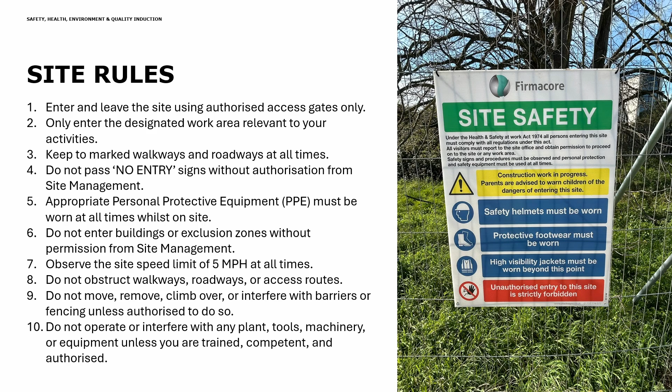Observe the site speed limit of 5 mph at all times. Do not obstruct walkways, roadways or access routes. Do not move, remove, climb over or interfere with barriers or fencing unless authorised to do so. Do not operate or interfere with any plant, tools, machinery or equipment unless you are trained, competent and authorised.

Do not excavate in any area unless a valid permit to dig has been issued by site management. All personnel involved in the permit to dig activity must be signed on to the permit and fully briefed before work begins. Do not ride on plant or machinery unless it has been specifically designed to carry passengers.

Do not disconnect, cut, or interfere with any electrical cables without a valid permit to work issued by site management. When working near protected trees or designated preservation areas, a tree protection form must be completed before work commences.

Employers are responsible for ensuring safe systems of work are implemented for their employees. Contractors and subcontractors must comply with all health and safety regulations whilst working on site. Report any hazards, unsafe conditions, or unsafe acts immediately to site management. Follow all emergency procedures issued by site management and ensure you know the location of the site assembly points.

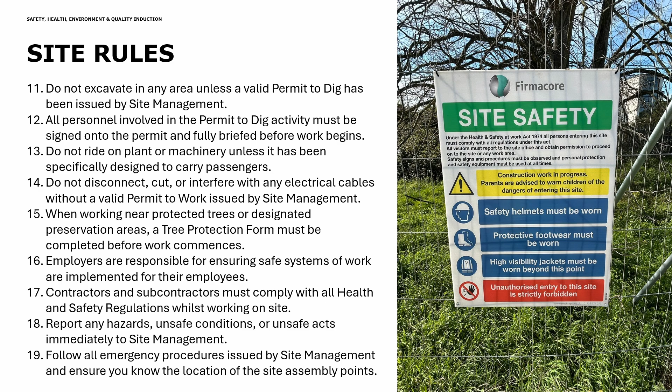Carry out your work safely at all times. If you believe any task is unsafe, stop work immediately and report it to site management. Remain aware of plant and machinery movements and keep clear of operating and swing areas.

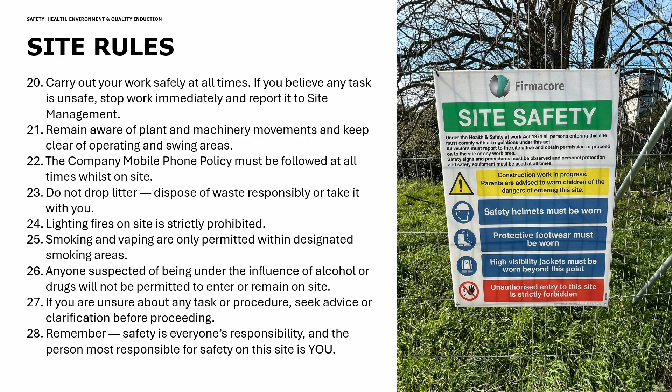The company mobile phone policy must be followed at all times whilst on site. Do not drop litter, dispose of waste responsibly or take it with you. Lighting fires on site is strictly prohibited. Smoking and vaping are only permitted within designated smoking areas. Anyone suspected of being under the influence of alcohol or drugs will not be permitted to enter or remain on site. If you are unsure about any task or procedure, seek advice or clarification before proceeding. Remember, safety is everyone's responsibility, and the person most responsible for safety on this site is you.

Exclusion zones. Firmacore Limited uses exclusion zones to prevent unauthorised access to hazardous work areas and protect personnel from potential risks. Exclusion zones must be clearly established and maintained at all times, and no person should enter or work within the zone unless it is absolutely necessary and authorised to do so.

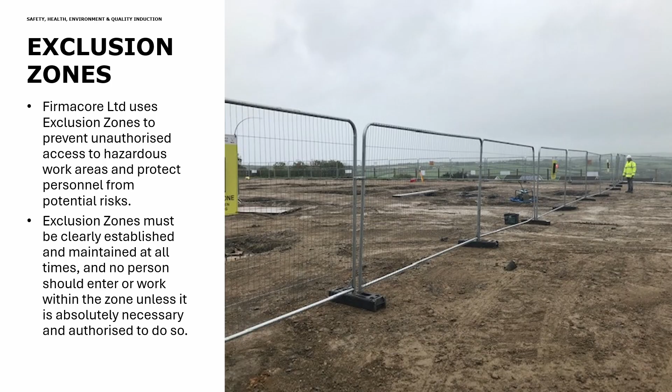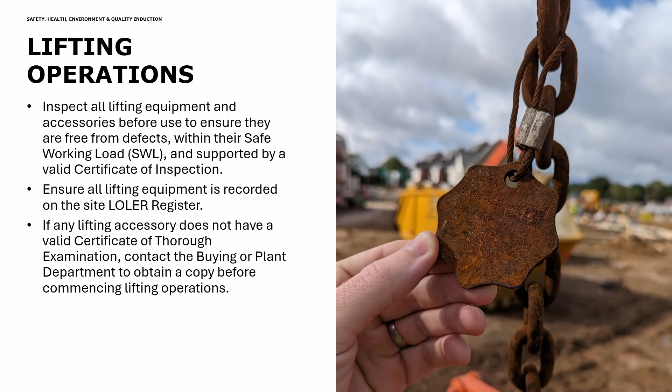Lifting operations. Inspect all lifting equipment and accessories before use to ensure they are free from defects, within their safe working load (SWL), and supported by a valid certificate of inspection. Ensure all lifting equipment is recorded on the site LOLER register. If any lifting accessory does not have a valid certificate of thorough examination, contact the buying or plant department to obtain a copy before commencing lifting operations.

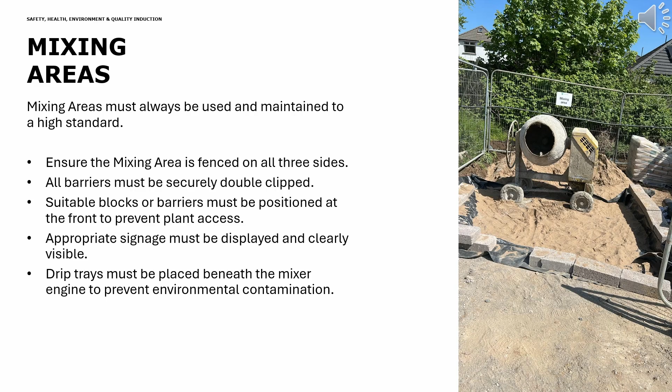Mixing areas must always be used and maintained to a high standard. Ensure the mixing area is fenced on all 3 sides. All barriers must be securely double-clipped. Suitable blocks or barriers must be positioned at the front to prevent plant access. Appropriate signage must be displayed and clearly visible. Drip trays must be placed beneath the mixer engine to prevent environmental contamination.

Banksman. What is a banksman? Banksmen are operatives trained to direct vehicle movement on or around site. They are often called traffic marshals. Can we still use banksmen for reversing vehicles? Yes, but only if trained and authorised. There is a hierarchy of control, which places segregation at the top. Banksmen should only be used in circumstances where other control measures are not possible.

What is a signaller? Signallers are operatives who are trained to direct crane drivers during lifting operations. How can we keep signallers safe? Ensure that they are trained and competent to direct lifting operations. Provide a protected position from which they can work in safety. Provide distinctive high-vis clothing for identification. Tell drivers that if they cannot see the signaller, they should stop immediately. Agree on the use of standard signals.

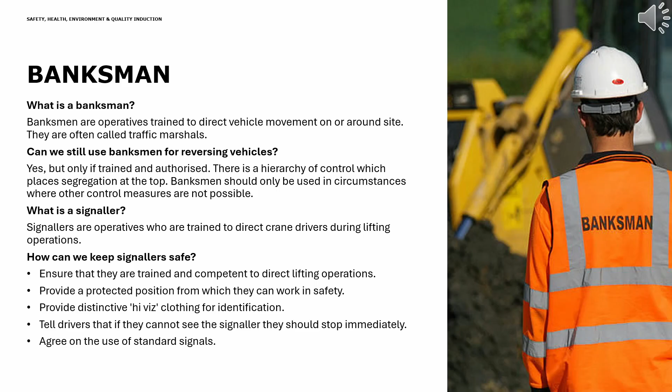PPE. You are required to wear your PPE at all times when on site. This includes, but is not limited to, a hard hat, high-vis jacket, safety boots, and, where appropriate, gloves, goggles, FFP3 dust mask, ear defenders, long-sleeve high-vis jacket and trousers if entering the highway. If your PPE becomes damaged or missing, then let the supervisor know, who will arrange for a replacement.

Plants and equipment. You are required to ensure the safe operation and maintenance of heavy machinery, such as dumpers, 360 excavators, and rollers at all times when on a construction site.

Always perform a pre-use inspection to check for any damage or issues. Ensure that you are trained and certified to operate the specific machinery. Use the safety features, such as seatbelts and rollover protection structures, ROPS. Adhere to the manufacturer's instructions and guidelines. Make sure the machinery is regularly serviced and maintained.

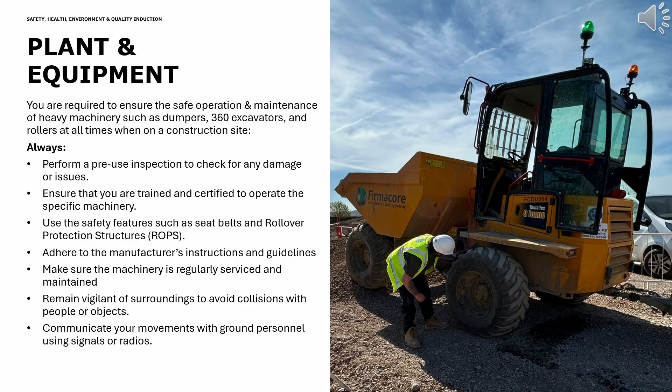Remain vigilant of surroundings to avoid collisions with people or objects. Communicate your movements with ground personnel using signals or radios. Where appropriate, use spotters or guides when operating in confined or crowded areas. Reduce speed in wet or slippery conditions. Follow designated routes for the movement of machinery.

Keep the machinery clean, especially windows and mirrors, for better visibility. Ensure that warning signs and beacons are functioning and visible. Check for proper functioning of brakes, lights, and other vital components. If any machinery becomes damaged, or if you notice any issues that could affect safe operation, report it immediately to the supervisor, who will arrange for it to be repaired or replaced. Never operate machinery that is damaged or in poor condition, as this poses a risk to your health and safety and that of your colleagues.

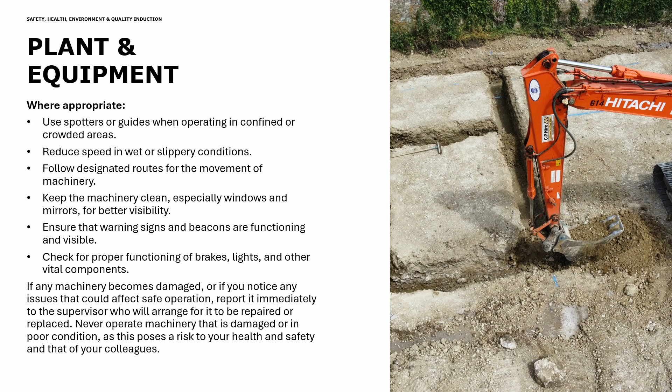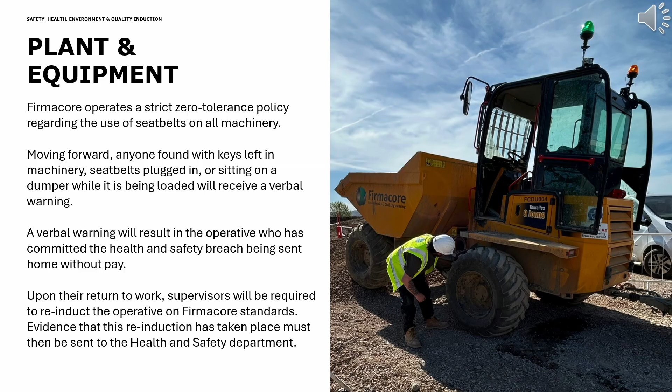Firmacore Limited operates a strict zero-tolerance policy regarding the use of seatbelts on all machinery. Moving forward, anyone found with keys left in machinery, seatbelts plugged in, or sitting on a dumper while it is being loaded will receive a verbal warning. A verbal warning will result in the operative who has committed the health and safety breach being sent home without pay. Upon their return to work, supervisors will be required to re-induct the operative on Firmacore Limited standards. Evidence that this re-induction has taken place must then be sent to the Health and Safety Department.

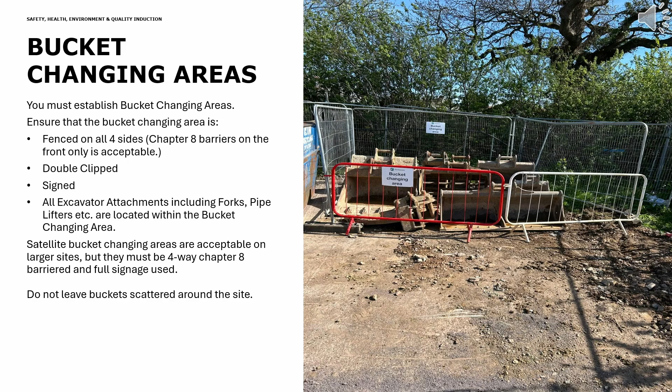Bucket changing areas. You must establish bucket changing areas. Ensure that the bucket changing area is fenced on all 4 sides, Chapter 8 barriers on the front only is acceptable, double-clipped, signed. All excavator attachments, including forks, pipe lifters, etc., are located within the bucket changing area. Satellite bucket changing areas are acceptable on larger sites, but they must be 4-way Chapter 8 barriered and full signage used. Do not leave buckets scattered around the site.

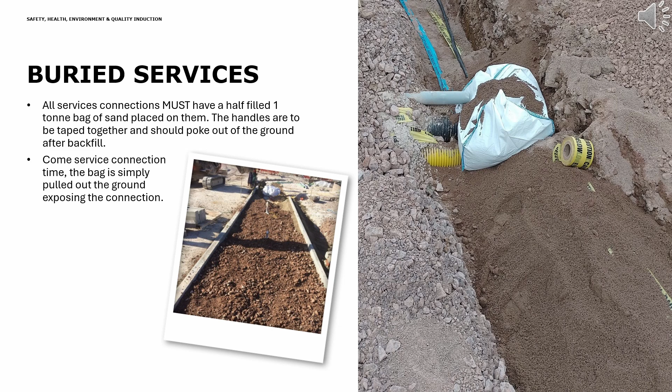Buried services. All services connections must have a half-filled 1-tonne bag of sand placed on them. The handles are to be taped together and should poke out of the ground after backfill. Come service connection time, the bag is simply pulled out the ground, exposing the connection. Only use insulated hand tools within 500 mm of any known live service.

No excavation for services should occur without first obtaining the correct utility drawings, drainage layout, and service box locations on house drawings. Cross-reference all drawings with the register. Complete permit to break ground and CAT scan the working area. The site supervisor must identify services and no-dig areas to the excavator operator.

Services must be positively identified where known to exist. This is to establish depth and direction. This can be done by digging trial holes or slip trenches using insulated hand tools. Vacuum excavation must be used around high voltage and high pressure services, greater than 2.0 bar.

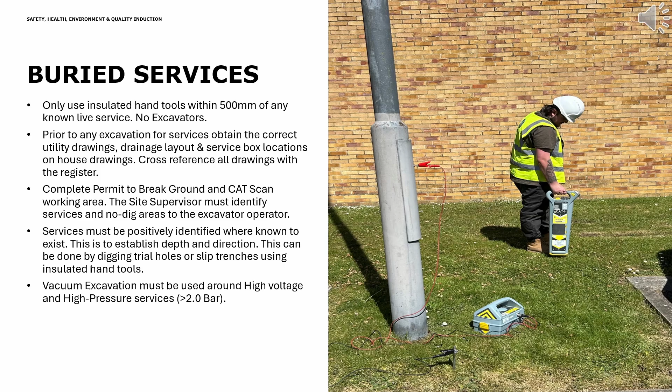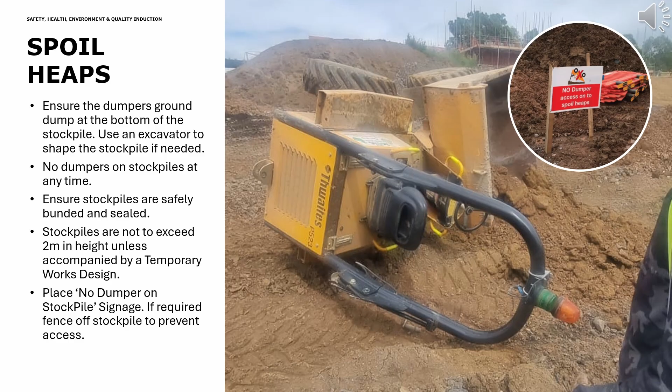Spoil heaps. Ensure the dumpers ground dump at the bottom of the stockpile. Use an excavator to shape the stockpile if needed. No dumpers on stockpiles at any time. Ensure stockpiles are safely bunded and sealed. Stockpiles are not to exceed 2 meters in height unless accompanied by a temporary works design. Place no dumper on stockpile signage. If required, fence off stockpile to prevent access.

Housekeeping. Safety enhancement: good housekeeping reduces the risk of accidents, enhancing overall safety. Increased productivity: a clean, organized site leads to more efficient workflows and higher productivity. Reduced losses and damage: proper storage prevents loss and damage to materials and equipment. Compliance with regulations: housekeeping helps meet health, safety, and environmental regulations. Improved health: elimination of dust and debris reduces health issues among workers. Positive image: a well-maintained construction site reflects positively on our business.

We have all worked tirelessly to build a great reputation. Please play your part in maintaining it.

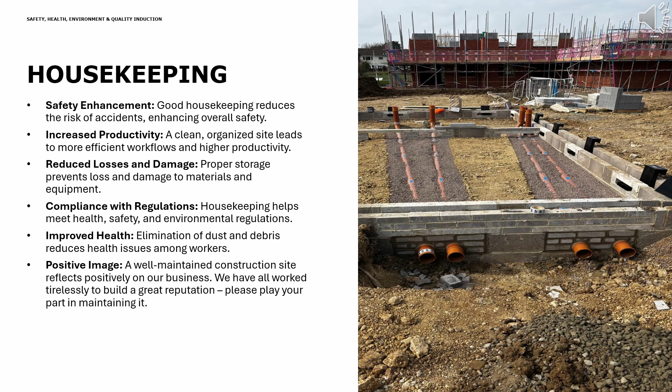Further benefits are prevention of fires. Proper disposal of flammable materials reduces the risk of fire incidents. Reduced environmental impact: proper waste disposal minimizes environmental impact. Improved morale: a clean and organized workplace boosts workers' morale and job satisfaction. Increased lifespan of tools and equipment: regular maintenance extends the lifespan of tools and equipment.

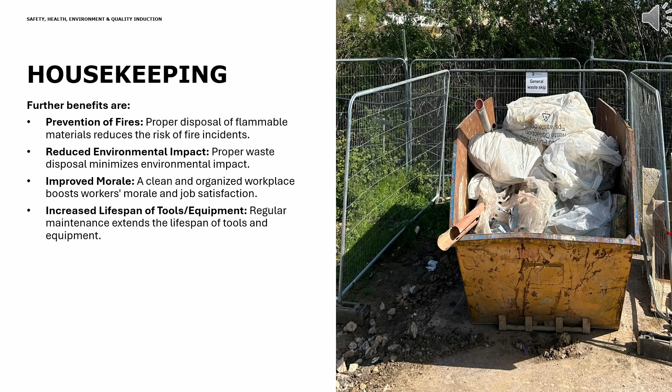What to do if you have a minor accident? There are steps you must follow. Seek first aid if necessary. Alert the site supervisor and fill out an accident report form.

The first aiders for the site will be shown to you when you first arrive on site. At the same time, you will also be shown exactly where the first aid box or station is and where the accident book is. Your supervisor will report the incident for you.

What to do in an emergency? If there is an emergency on site, you must do the following.

Raise the alarm and inform any others of the need to evacuate. Leave the area by the nearest exit. Make your way to the assembly point. Contact the emergency services. Emergency exits and assembly points will be shown to you when you arrive on site.

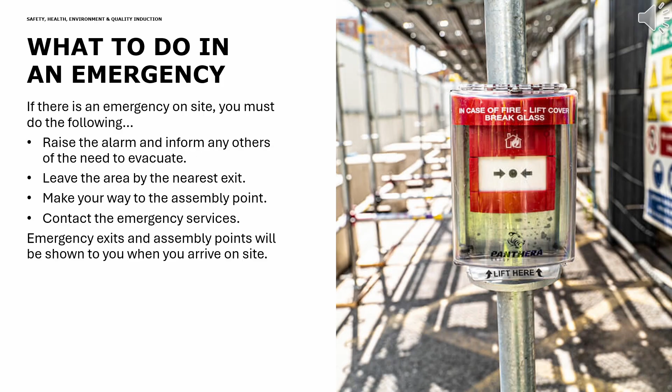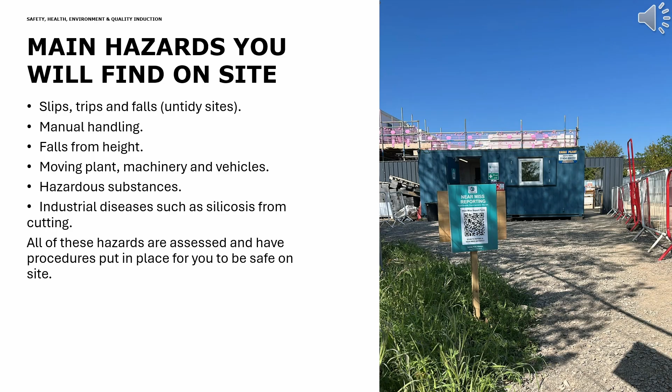Main hazards you will find on site: slips, trips and falls, untidy sites, manual handling, falls from height, moving plant, machinery and vehicles, hazardous substances, industrial diseases such as silicosis from cutting. All of these hazards are assessed and have procedures put in place for you to be safe on site.

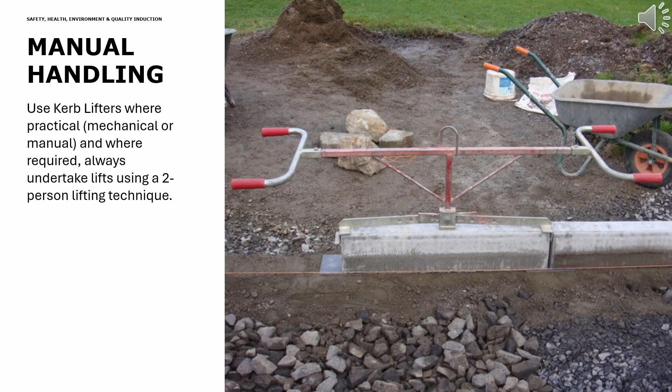Manual handling. Use Kerb Lifters where practical, mechanical or manual, and where required, always undertake lifts using a two-person lifting technique.

Excavation safety. Protective systems. Depending on the excavation depth and soil type, use protective systems such as trench boxes, shoring, or benching to prevent cave-ins. Safe access and egress.

Provide ladders, steps, ramps, or other safe means of exit for workers in trench excavations. Regular inspections. Conduct daily inspections of the excavation site, particularly after a rainstorm or other changing conditions that might affect the soil stability.

Hazard awareness. Clearly mark all excavation edges and provide barriers or fencing around the excavation site to prevent accidental falls. Falling and tripping hazards. Keep the excavation site clear of debris, tools, or other materials that can pose falling or tripping hazards. Use youngman boards to safely walk across an open trench.

If it is not safe, don't do it. Firmacore Limited will fully support you if the task you are being asked to perform is unsafe.

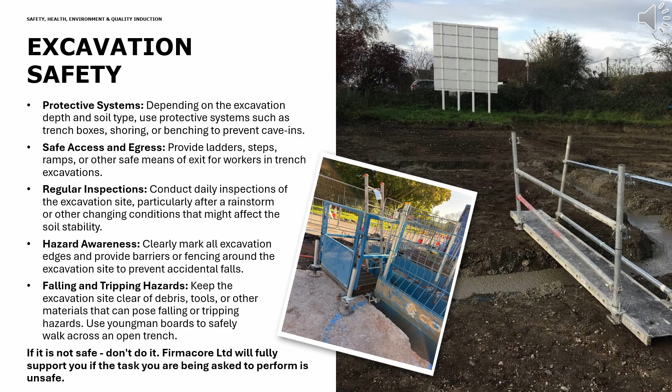Dust management. All cutting will be used with dust suppression, FFP3 face masks, hearing protection, eye protection, and away from members of the public. If you feel any of the following symptoms, please inform your contract manager or health and safety manager: shortness of breath, loss of appetite and weight loss, chest pain.

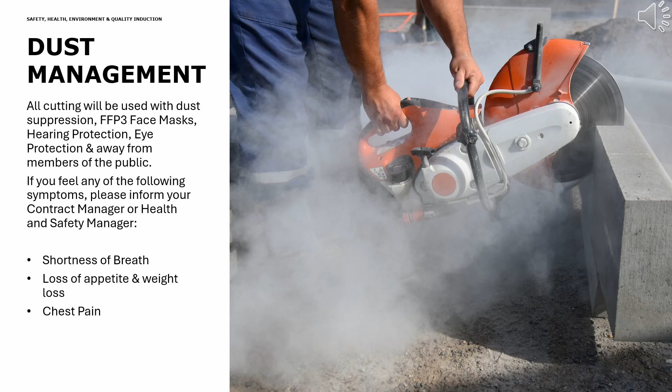Overheads. Before commencing works near or under overheads, the following must be completed: overhead cable survey conducted by the utility provider, overhead cable survey conducted by Firmacore Engineering Department, goalposts, exclusion zones and signage implemented, restricted machinery for working under the overhead cables.

Firmacore's overhead cables emergency procedures displayed. Overhead cable induction quiz to test knowledge on types of cable, utility provider and exclusion zones. Toolbox talk on the HSE GS6, avoiding danger from overhead power lines. Overhead cables permit filled out. Daily briefing conducted for any activities passing or working underneath the overhead cables. Perimeter inspection log completed daily.

Near-miss reporting is an essential part of safety management on a construction site. It involves reporting incidents that could have resulted in injuries, illnesses, or damages, but did not due to chance. Safety is our topmost priority, and it involves every one of us. Near-miss incidents, though they don't result in injury or property damage, provide a unique opportunity for us to learn and improve our safety standards. We understand that in a fast-paced work environment like ours, reporting near misses might seem time-consuming or even unnecessary, especially when no harm was done. However, every near miss is a potential accident that we narrowly avoided.

By reporting these incidents, we can identify potential hazards before they cause harm, and it allows us to proactively address and eliminate these risks. Your safety and well-being are paramount to us. We believe in learning from every incident, and your reporting plays a crucial role in that process. Your keen observation and active participation in reporting near misses can make a significant difference in maintaining a safer and healthier work environment.